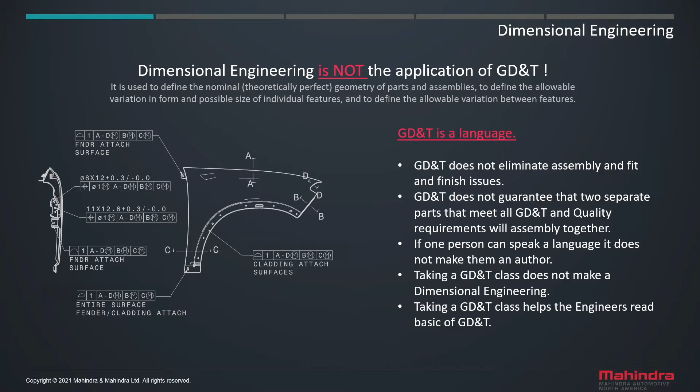As a starting point, we decided to look at Mahindra as a series of separate programs working in unison to fully benefit the organization. A program can be defined as a refresh of a product, the addition of new accessories, a new product entirely, a quality or continuous improvement program, or etc.

From there, we decided to focus on one single program and break down the processes involved in driving each program. Looking inside each program, we clearly defined three processes that drive each program to satisfy and support the program goals and objectives. The three processes are the APQP process. The APQP process describes how customer needs and expectations are linked to planning and defining a quality program - a product development-centric process with the support of manufacturing and the quality communities.

Lean is concentrated on the plant and product production layout, establishing a philosophy and a system of interconnected processes and people working to continuously improve how they deliver value to the customers. The main focus on Lean is on the manufacturing plant layout and throughput.

Last, Six Sigma. Six Sigma is focused on well-defined projects that have a direct impact on specific defects.

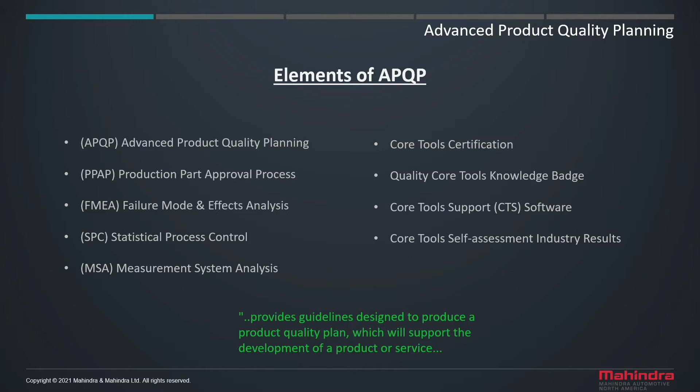AIAG has published additional supporting standards to ensure the commonization of product and quality planning. The importance of the APQP as it relates to lean is that the product is designed with built-in quality that accommodates manufacturing and quality limitations.

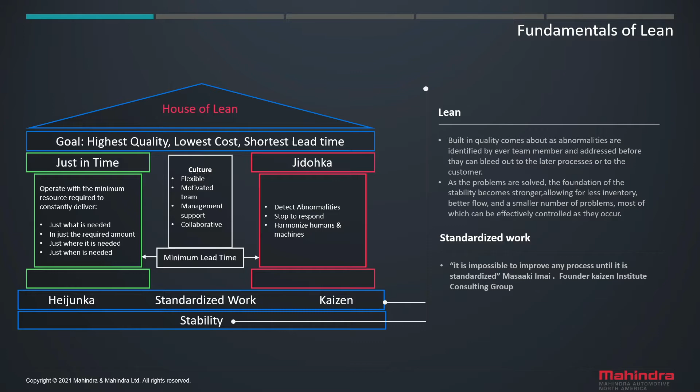Next, lean. The second process we're all familiar with. Toyota Production System is the frame for what is often called lean management and has been embraced globally as the standard for plant and production layout. The importance of lean structure is that in order to improve, the house must be built on a solid foundation of stability. The stability is rooted in the built-in quality of the product design and quality from the APQP process.

Third, Six Sigma. Six Sigma is focused on the control and improvement of variation in very specific, clearly defined problem areas which contribute to large swings in variation and need improvement. Very specific and clearly defined micro projects, as we define them.

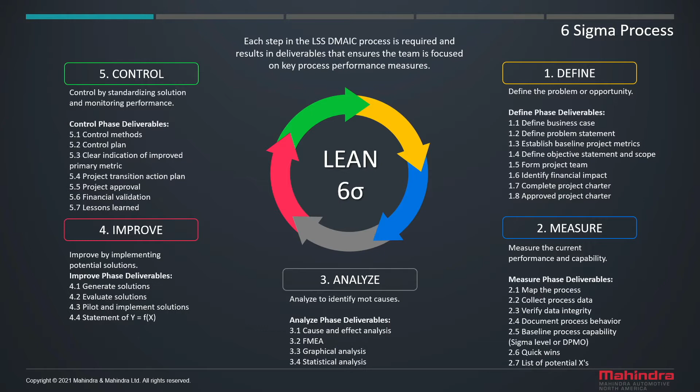Similar to the PDCA of APQP and Lean, Six Sigma is based in the DMAIC, Define, Measure, Analyze, Improve, and Control process. It is important to note that each one of these processes is circular and continuously builds on a learning cycle of rotation. To illustrate the PDCA and the DMAIC processes' rotation, we view them as gears driving the program. We add in the APQP, we add in the Lean, we add in the Six Sigma.

When we've added all of these gears into our program, what we've noticed is they are all working, but they are all working independently of each other. APQP is a lot of stuff going on in product development, Lean is working inside the plant, and Six Sigma is focused on strategically reducing specific problems and variation and control.

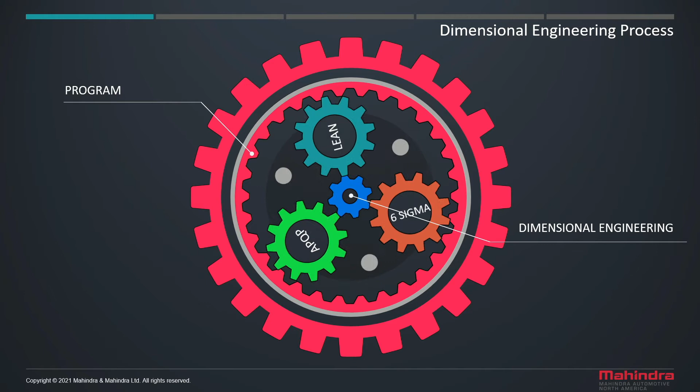So enter the dimensional engineering process. The dimensional engineering process unites all three processes and increases the overall efficiency and effectiveness of the program, leading to shortened development cycles by identifying and eliminating waste and cost throughout the entire development process. Note, the dimensional engineering does not encompass all the work of each one of these processes, but provides a driving link between all three. So, when I've added all three and put a dimensional engineering process in place, we find that now the system is working.

The steps to the PDCA and the DMAIC are simple and straightforward. 1. We make observations and we set targets through benchmarking and prototyping. 2. We question the ways to improve process and/or design. 3. We form a hypothesis on how to improve. 4. We conduct a simulation based on our hypothesis and set targets and goals again. 5. Test the simulation results in prototype build. Last, we use all these results in the simulations of prototype to make new hypotheses and new simulations to improve.

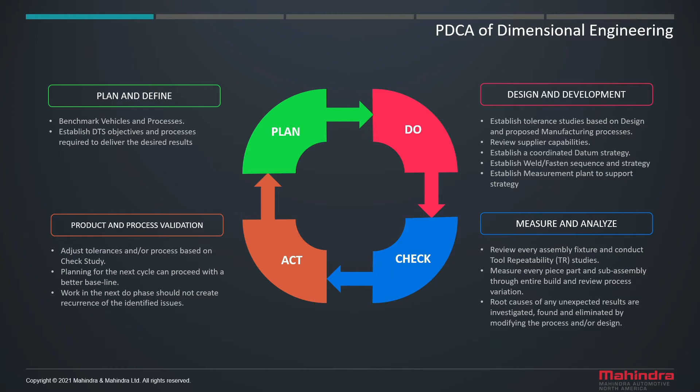Act. Institute corrective actions for the next build. Planning for the next cycle can proceed with a better baseline. So this is again a circular rotation that we follow through every single milestone phase as described in the APQP and Mahindra product development system. Before we proceed, we now need to understand what are the dimensional engineering tools in the engineering toolbox. Everyone has heard the saying, the right tool for the right job, and you are only as good as your tools.

Both sayings are true when it comes to the choice and application. Knowing when and how to apply the right tool is the key. The dimensional engineering tools are datum coordination. Datum coordination is the most important tool in the toolbox. Datum strategy will tie design, manufacturing, and quality processes together. The foundation of standardization and stability within our whole system is based on datum coordination.

We benchmark competitive vehicles for their fit and finish. We review their manufacturing processes. We review their material selections. We understand their subassembly and joint concepts for fastening the process. Fixture designs: ensure that the fixtures match datum structures for stability. Establish TR and gauge R&R capability. Ensure that all fixtures are repeatable and will produce the desired results that we are looking for.

And third, we work on establishing clamping and fastening sequencing. Clamping and fastening sequencing is often overlooked in fixture designs, but as the clamps and fastenings go down, you move variation in certain ways, and we need to eliminate as much as possible.

Last, the DCS software suite, which is what we're here to talk about. Using the DCS software suites to ensure datum coordination and maximize tolerances that support the entire ecosystem goals, with a focused analysis on characteristics most likely to impact product and production performance, while coordinating the collection of measured data.

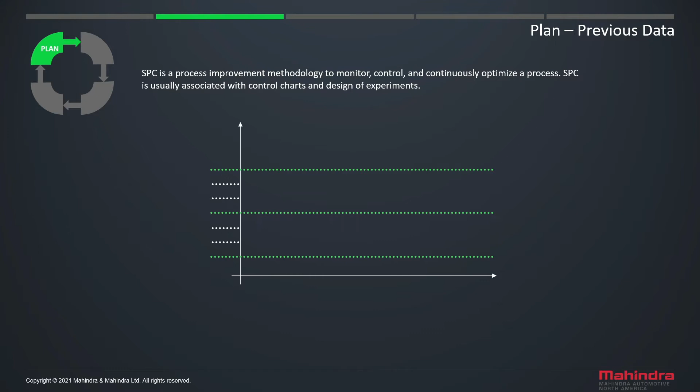As variations are identified, the dimensional engineer needs to establish controls to stabilize and manage them. Variation is measured and recorded using SPC data. As variations are identified, the dimensional engineer needs to use his tools to stabilize and reduce common causes of variation as early as possible in the design and manufacturing process.

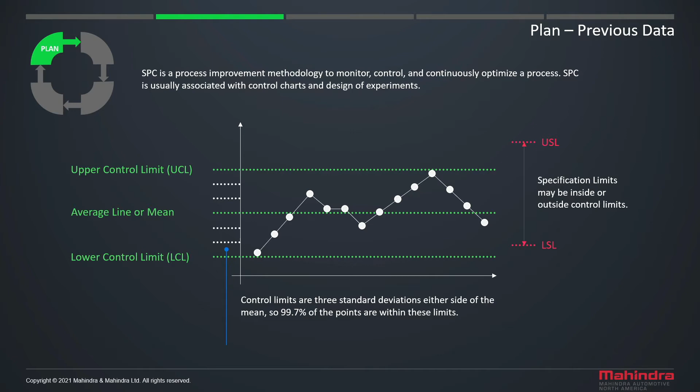Additionally, it would be wasteful to continually collect data and document processes from previous programs and not learn from it. Utilizing historical data from the QDM database as the starting point for product design and manufacturing development, the dimensional engineer will work between the design and manufacturing groups in the iterative process of tolerance analysis utilizing design and manufacturing concepts.

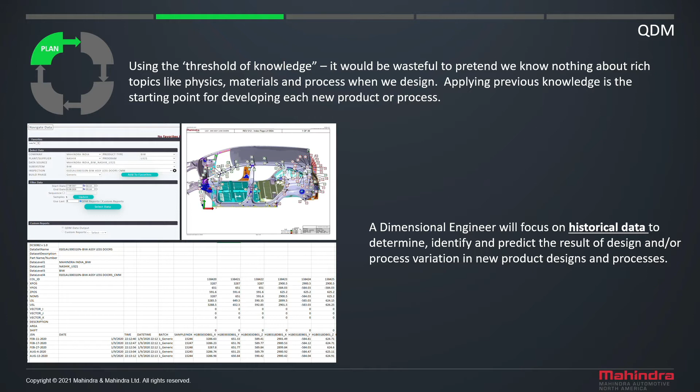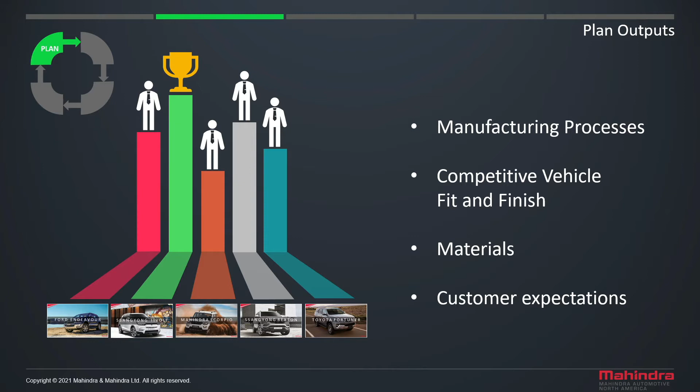Last in our planning phases, the dimensional engineer participates in benchmarking of competitive vehicles to review the manufacturing processes, the fit and finish, the material, and the customer reviews and expectations. The output of the planning stage we have clearly defined. We will have design goals for each phase, build, reliability and quality goals, a preliminary BOM, preliminary process flow, preliminary special characteristics, and established DTS targets and objectives.

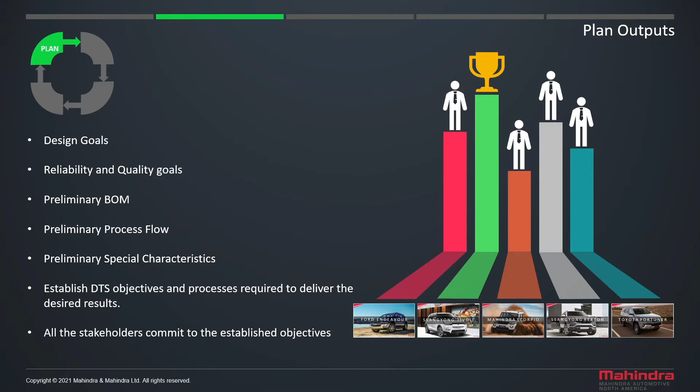The next step leads us straight into the do phase. In this step, the dimensional engineer will work between the design and manufacturing groups to start the iterative process of tolerance analysis utilizing design and manufacturing concepts. The dimensional engineer uses a set of design for manufacturing and design for assembly principles.

The importance of DFMA is underlined by the fact that about 70% of manufacturing costs, that's cost of materials, processing, and assembly, are determined by design decisions, while production decisions, such as process planning or machine tool selections, are responsible for only 20%. Design for manufacturing and assembly is a simultaneous engineering process designed to optimize the relationship between design function, manufacturability, and ease of assembly. Note that 5% is contributed to labor and 5% to overhead.

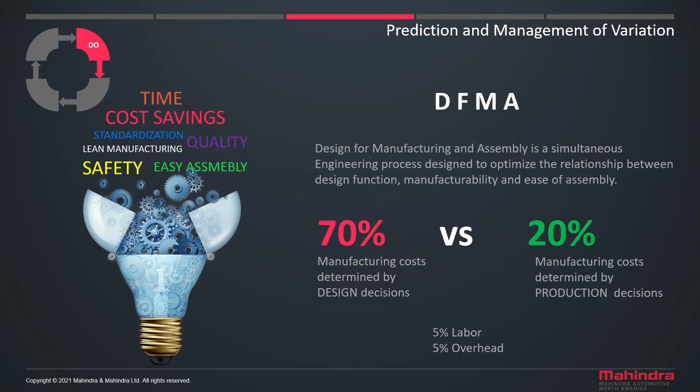While working between the product, manufacturing, and quality groups using the DFMA principles, the most important tool for a dimensional engineer to manage and control variation is the datum strategy. Datums are the connective tissue that provides one common link for data across the entire ecosystem. Product engineering uses datums to design and fabricate. Manufacturing uses them to locate and assemble, and quality uses them to locate in their check fixtures and collect data.

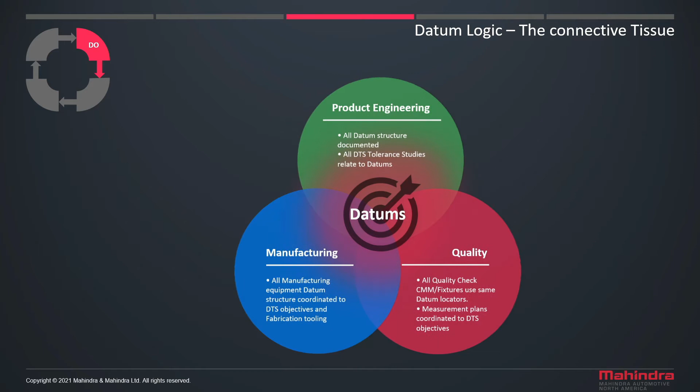The importance of datum logic cannot be stressed enough. These are the binding tissues between all three development groups. At Mahindra, we have decided that ownership of the datum strategy is the responsibility of the dimensional engineer.

During our research to define the dimensional engineering process, the ownership of datums was a controversial topic, and each group claimed ownership. Product engineering, manufacturing, quality, and even some of the suppliers stepped forward and said that they own the datums on their products. While all groups agreed that datums were selected on their functionality, what defines the functionality? When one part was given to each group, everyone came up with a different datum scheme that focused on their own specific needs and not the program's.

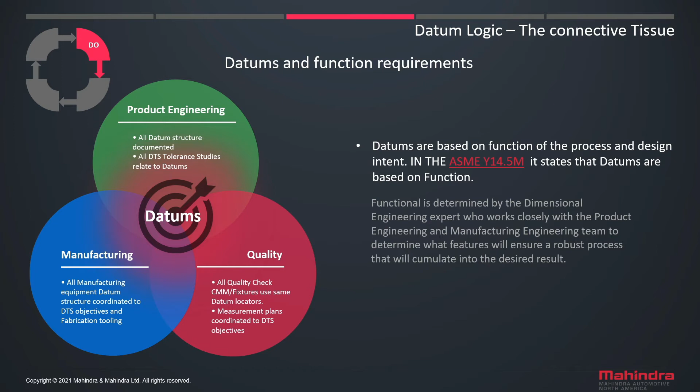To ensure connectivity and standardization, the dimensional engineer is now responsible for collaborating and working with all these groups to establish a common set of datums to ensure coordination. Once we have established an MBOM and a preliminary datum strategy, as previously discussed, the applications of tolerances are developed from previous programs and lessons learned.

Using benchmarking in the QDM database, preliminary tolerances are applied. We are building on previous knowledge. So we do not automatically start assigning values and start calculating. We are actually scientifically going back on everything we have learned and building on those learnings.

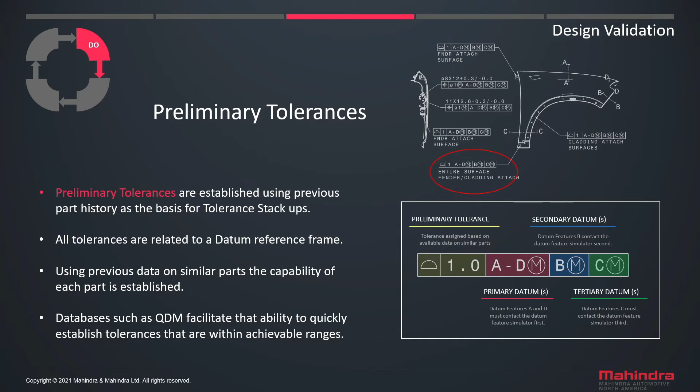From the preliminary MBOM, datum strategy and tolerances, the dimensional engineer, using a CMM macro developed at Mahindra, will now go and place the CMM measurement points inside of the CATIA model. Each point is named, the tolerances are applied to the point, and the XYZ coordinates are maintained inside of CATIA.

By managing and placing the CMM points, there is consistency and coordination provided through the 3DCS model simulation to the measurement process. Points are placed opposing and normal to each other on every mating assembly to ensure coordination.

Additionally, CMM points are then loaded into the QDM database for ready access for all suppliers to download and input into their own CMM program. This saves a tremendous amount of time, money, and ensures our coordination. Next, the 3D simulation will begin, and Byron Hamm from our group will provide you with a short overview of how we did the simulations.

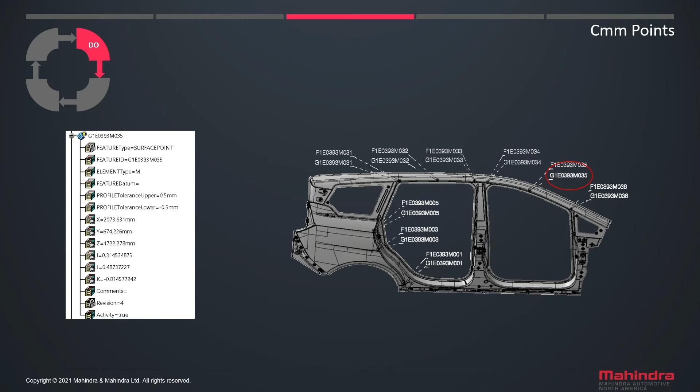Today I'm going to show you how we can input QDM data into a 3DCS model. As you can see on the screen, we currently have a model that has points around the edge of the door opening. These points correspond to CMM points that are in the program. The names are the same as would be in the program.

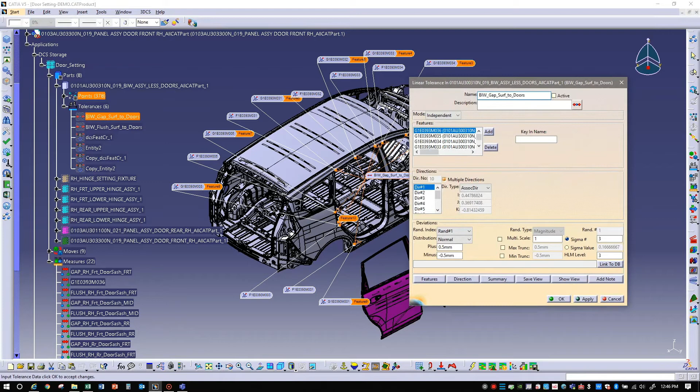These currently have tolerances based on the GD&T sheet provided by the dimensional engineering team. Currently, they are at plus or minus a half. What we would like to do is replace these tolerances with actual CMM data taken from the plant. Later, you will see how this data is exported from QDM Web.

In order to get these points into the model, first we have to create a tolerance. We want to select a user DLL. Click Add, and then the dialog screen comes up. We'll give it a new name, in this case body in white CMM data, and then select a user routine. In this case, we will be using the DCS TL CMM DV2.

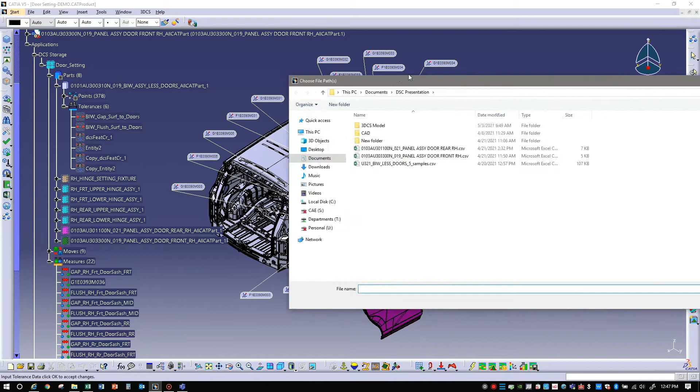What we need to do is connect the file that came from QDM to this tolerance. To do that, we have to select More. From this dialog, we select Strings, and from this dialog box, it's asking for the path to the file. So click on Add File Path, your file folders will show up, and connect it to the QDM output file, which in this case is the U321 body in white less doors that was provided. Hit open, hit OK, OK again.

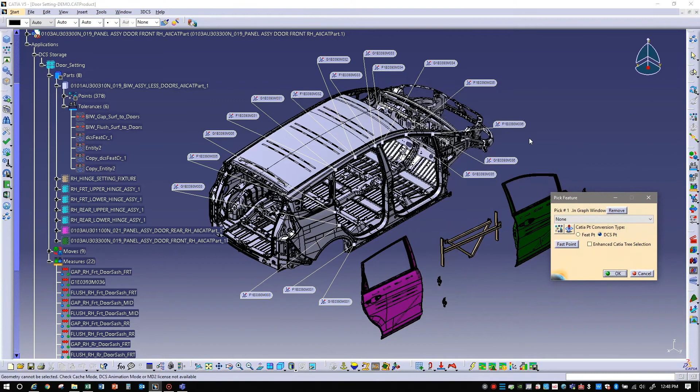So this will link the CMM point data to the tolerance. What we have to do now is specify which points we want those to be on. So we select add, and then we select all the points that we want the CMM data to be connected to. In this case, we're going to select all these points. Once this is done, you can hit OK, and you will see the CMM points will be in here.

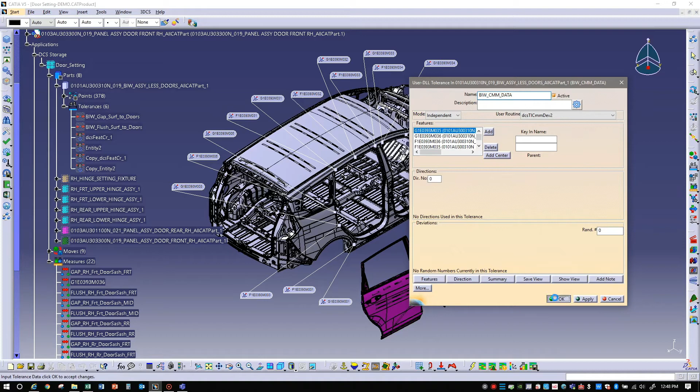Currently, everything is inactive. If we activate all, now you have the CMM data attached to these points, but we also still have the original tolerances. So we have to deactivate these two so that they don't influence the CMM or the simulation data. If we run a quick simulation,

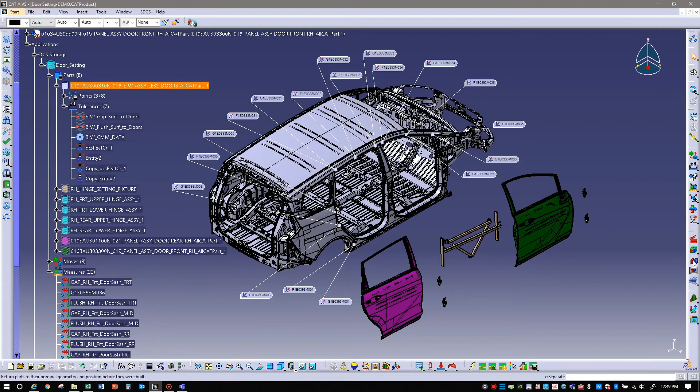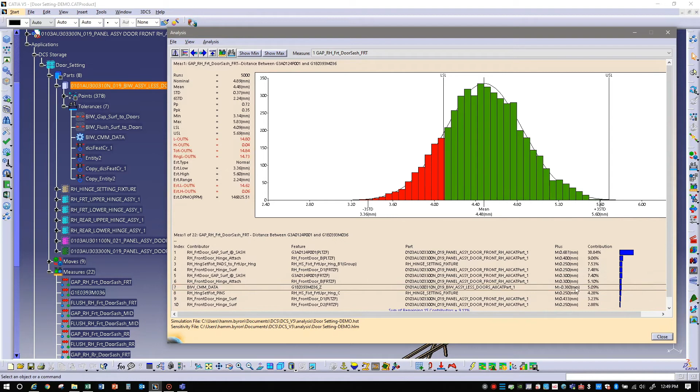you will see that the body in white CMM data is showing up in the high-low mean in this location. This shows us how we can replace current tolerances with actual CMM data from the plant, providing us new information on analysis.

Thank you, Byron, for that presentation of the 3DCS models and how we are using them. After we've done our do part of the 3DCS model and tolerance analysis, we now are going to move into the check phase. Working with the quality groups to collect data, the dimensional engineer will review the data collection processes and begin to root cause the sources of variation in each prototype build.

But before we can build or measure actual parts, we need to ensure that the fixtures and the measurement processes are in agreement with the datum structure and the measurement plan.

Utilizing the MSA and PPAP manuals from the AIAG group, the dimensional engineer will ensure and participate in a gauge R&R and a tool repeatability study for all check fixtures and assembly fixtures. The dimensional engineer will participate in all design reviews and buy-off before construction of both types of fixtures.

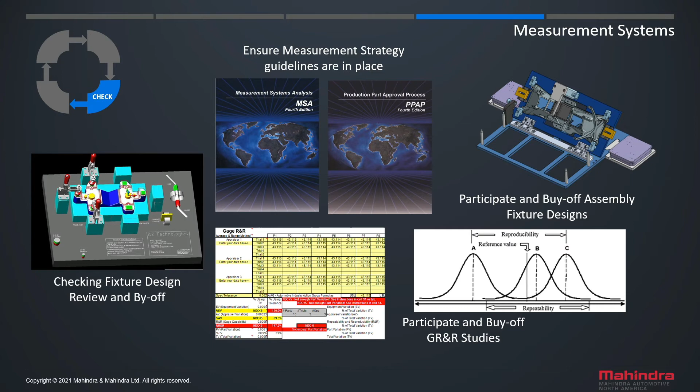This is to ensure that we are actually following the exact datum strategy that has been developed and put into the CATIA models for all fabrication and product development sources also. As we have discussed in the previous steps, utilizing the QDM database historical data, we establish preliminary tolerances. Our next step is to start collecting data from our prototype builds and use it to input into the QDM. So now, let's take a look at QDM and how we are using it.

The Quality Data Management System is a modular quality system that collects, standardizes and analyzes measurement data to deliver real-time insight into production quality. One of the things QDM does is it provides coordination. Utilizing QDM, we are now able to manage the placement of all of the CMM points in CATIA and ensure the coordination between our 3DCS models, PPAP, and process checks.

As we put the points in CATIA, they are then exported and put into QDM for all suppliers and measurement processes to use. This ensures that we are maintaining our coordination through every single build and all the way through the final process.

Tracking. By managing the points through the process, we are able to track the same exact point from build phase to build phase. This enables us to track improvements due to design and/or process changes through each build. As we change sequencing of clamps, sequencing of fastening devices, as we've made design changes, we are able to use the same exact point and monitor it to gauge the impact of the changes from the previous build.

Accountability. Accountability allows us to track and maintain the accountability of our suppliers and our in-house plants. The program will automatically send out notices of data due to match our control plans. Accountability is always a tough situation to call. It is not to be used as a punishment against any supplier or internal supplier.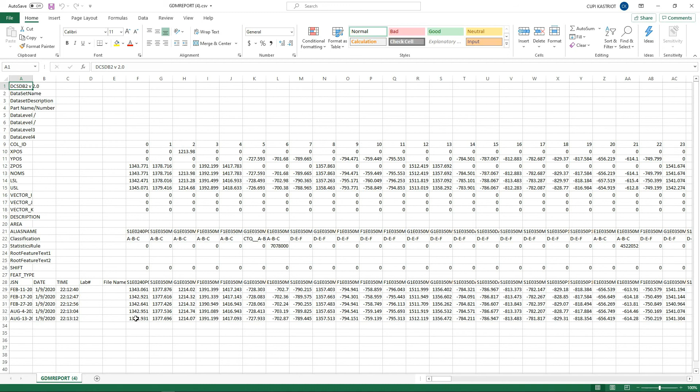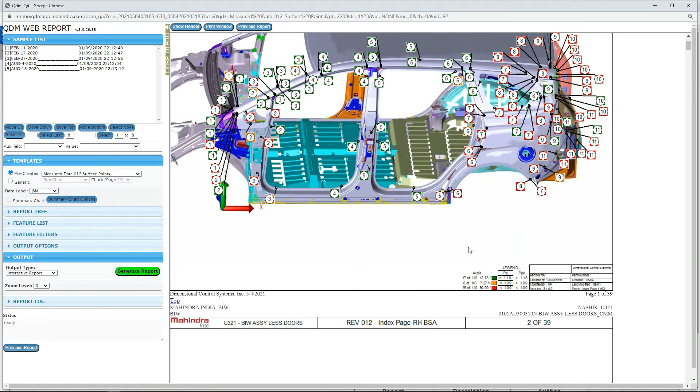Going back to the QDM web report page, it is worth taking a look at an interactive report created by the system. To create one, you just have to select Interactive Report from the Output Type drop-down menu and hit Generate Report. The first few pages, depending on the total number of the measured features, are allocated to the measurement points roadmap. Each circle tells you at a glance on which page the trend chart is located, and more importantly, if it is or is not out of spec, based on pre-assigned criteria.

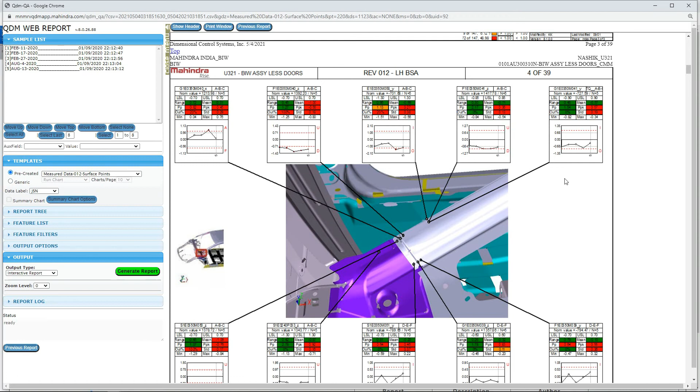Scrolling through the report, you can then see the chart pages that can be personalized to your needs. Every chart points to the exact location in the CAD data, so you always know immediately what feature you're looking at. They are also expandable by simply clicking on them to access more details.

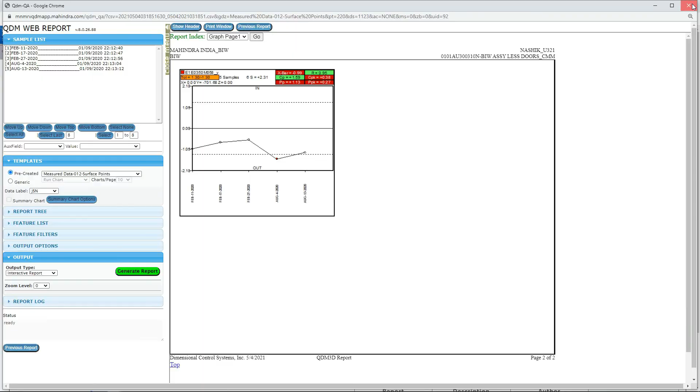Of course, these are only some of the scenarios Mahindra is using QDM Web for. Over the past few years, it has become a key partner on our journey to achieve our quality goals.

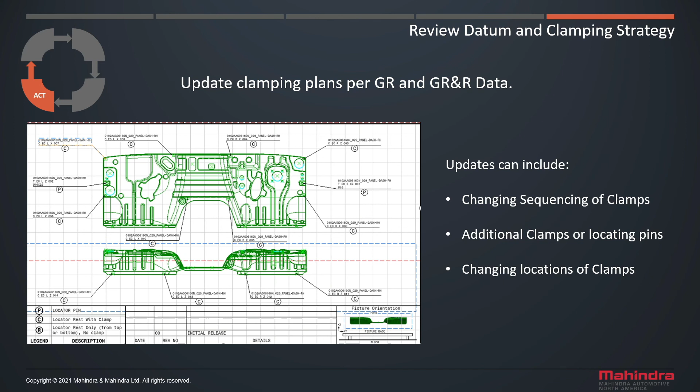Once we have determined that we have a stabilized datum strategy, each joint of every assembly will be reviewed to ensure that all detail level parts meeting tolerance specifications can be loaded into the assembly fixture and properly located without any manual manipulation. Parts and assemblies should not introduce any stress into the fixture and assemblies that will adversely affect the location of critical features.

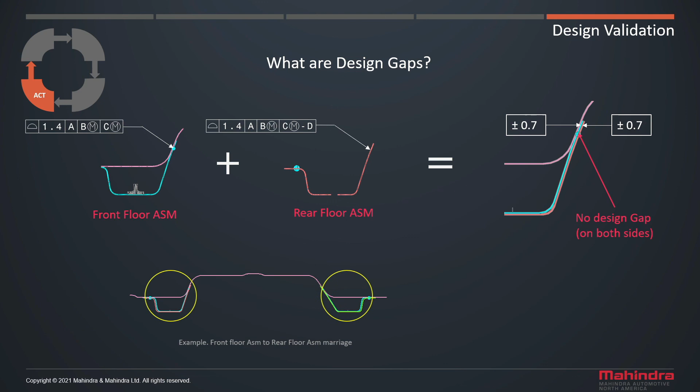At the earliest stages of the design, the product engineer typically begins with a nominal design that shows no design gaps. Given the fact that we have already acknowledged that variation exists, we know that there is no such thing as a perfect part and/or process, and the design needs to provide allowances for tolerances without degrading the structure of the design. Without design gaps, there is an assumption that if all parts and assemblies meet all GD&T requirements, they will not assemble without manual manipulation.

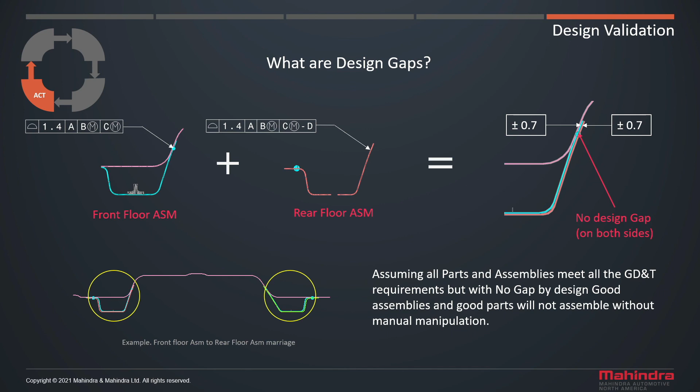By reviewing each joint concept of the vehicle, the dimensional engineer will begin to add small design gaps based on all the anticipated and measured variation. The gaps are intentional and deliberately added to the design to allow parts and assemblies to fit together in the fixtures without causing additional variation to the critical features.

Working with the manufacturing engineer is important to stress the weld and fastening sequences at this point. Geospots are put in place to ensure the stabilization of products before they move to another fixture.

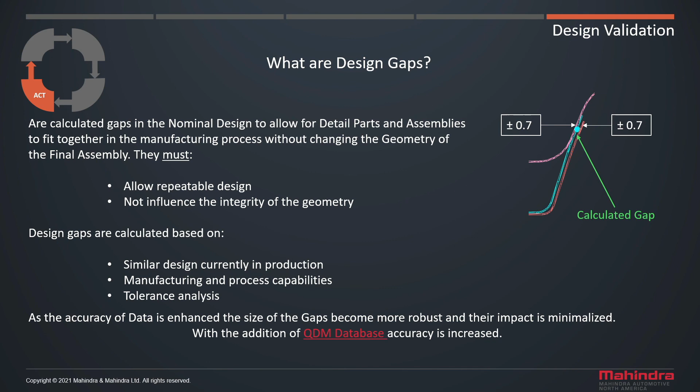Once the process and parts are stabilized, we can now focus our attention on the fit and finish. As stated earlier, through the design and prototype build processes, the dimensional engineer is constantly working to reduce variation to meet the fit and finish targets.

Throughout each prototype build phase, all of the following are under constant scrutiny: the fastening sequence, the fastening methods, joint design and configuration, assembly sequences, and piece part tolerances. Tolerance simulations and analysis are continually updated with that information.

At SOP, if all processes and parts are stabilized and repeatable and we have still not met our DTS objective, the team is now faced with some serious decisions. Do we take the time to look for different processes that may cost more time and money to achieve our objective? Do we tighten tolerances on specific parts to allow us to meet our objectives, which once again will cost time and money? Or do we change the DTS to match the capability and then allow the Six Sigma group to come in and continually refine specific areas, thus updating our DTS to the predicted and controllable results that will be different from the original target?

The reason we would do that is to ensure that the plant is not held responsible for DTS objectives that are unachievable at this time.

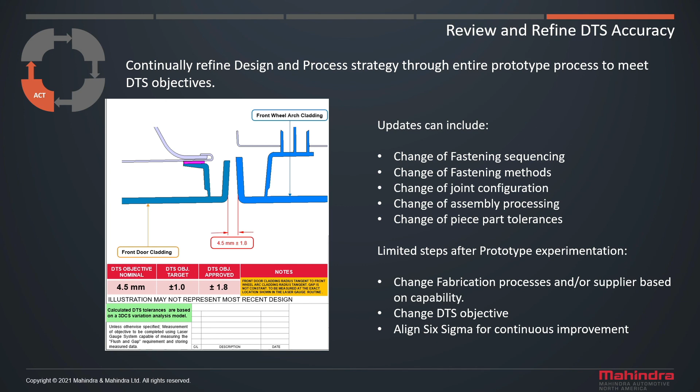As you can see, we consider the dimensional engineering process to be an iterative process that builds on itself throughout the design and prototype phases. The key is being able to plan, do, check, act for each milestone and continually check the results versus what you had anticipated to have happening, making corrective actions.

One of the bigger keys of the whole plan, do, check, act, as we've set it in place, is that as it builds upon itself going up that hill and gets to SOP, the next program behind it does not start again at VP0, but it only picks up the data that we've learned from our previous experiences and applies it to the next program.

This is what we consider a continually building on itself process, and this is the direction that we are headed at Mahindra. Thank you for your time and patience.